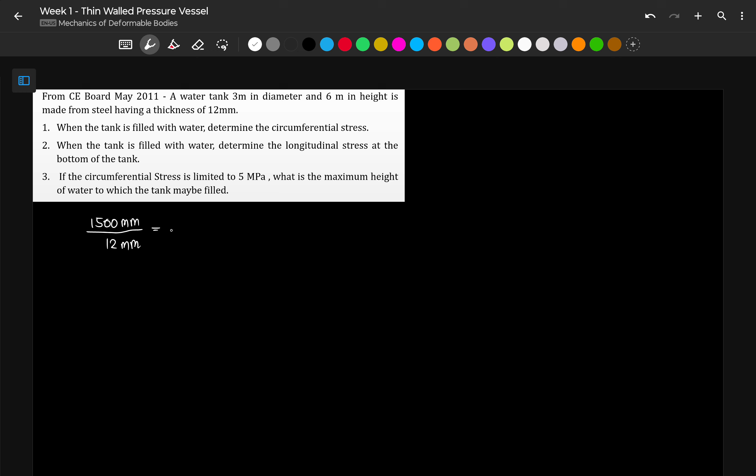Our radius is 1,500 millimeter, and our thickness is 12 millimeter. That is equal to 125 ang kanilang ratio, which is greater than 10. So, pwede natin sabihin na ito ay thin-walled.

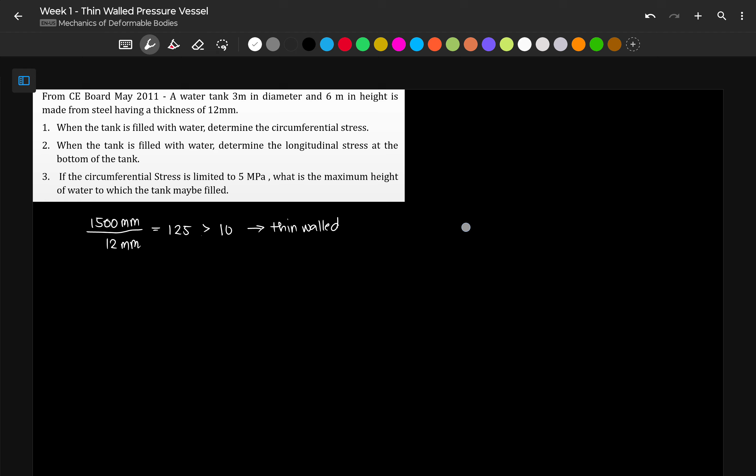Okay, so continuing. So, sure na tayo na ito ay thin-walled. Since cylindrical yung ating tank, pwede tayo gumamit ng formula. Pero for now, I think much better kung malaman muna natin yung konsepto, i-apply muna natin dito, tapos i-check natin.

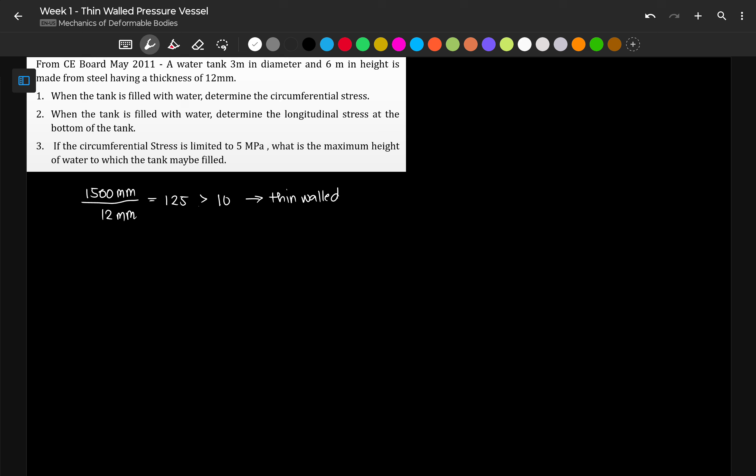Later on. So, ang tanong sa atin nung una, number 1, ay circumferential stress. Pwedeng tangential stress yon, pwedeng hoop stress, pwedeng girth stress. So, that is sigma sub t.

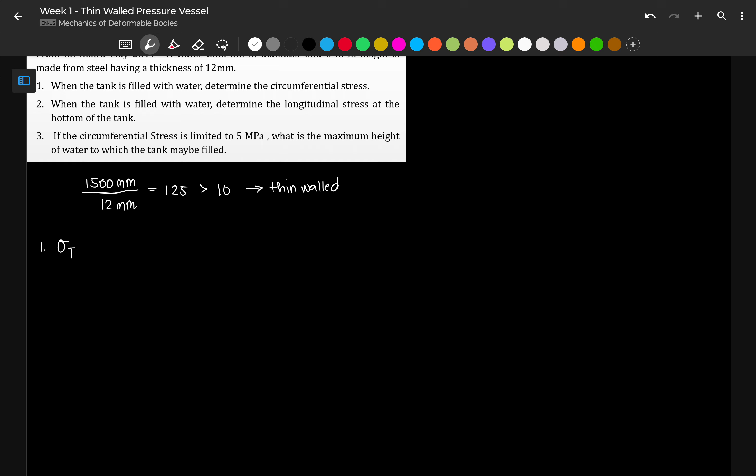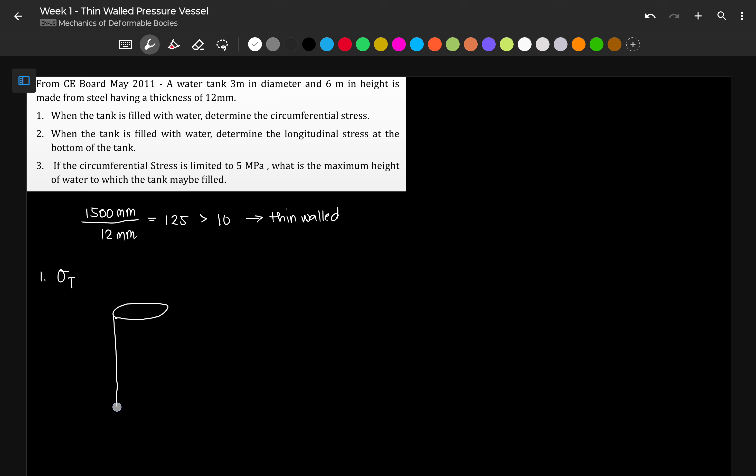Sabi natin, yung sigma sub t, nakukuha natin pagka kinat natin longitudinally yung tank. So, yung water tank daw natin ay cylindrical in cross-section. Kaya, dahil sa diameter, patayo yung gagawin kong drawing sa tank. Ito yung ating tank.

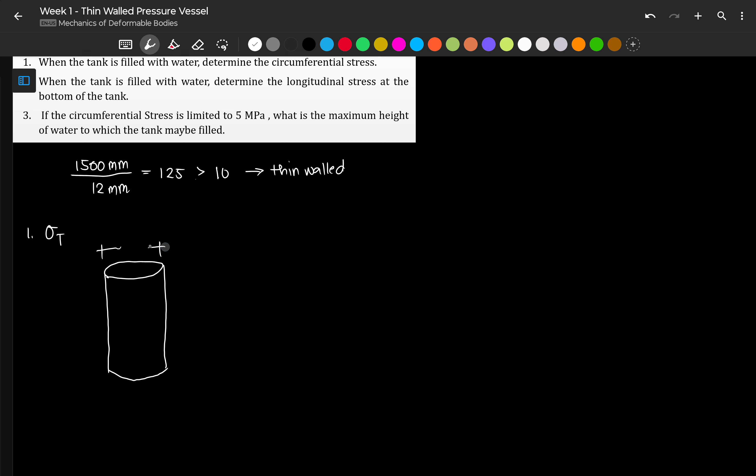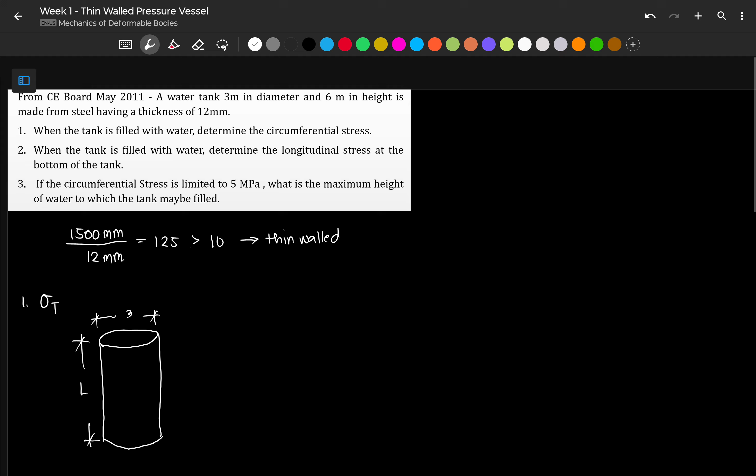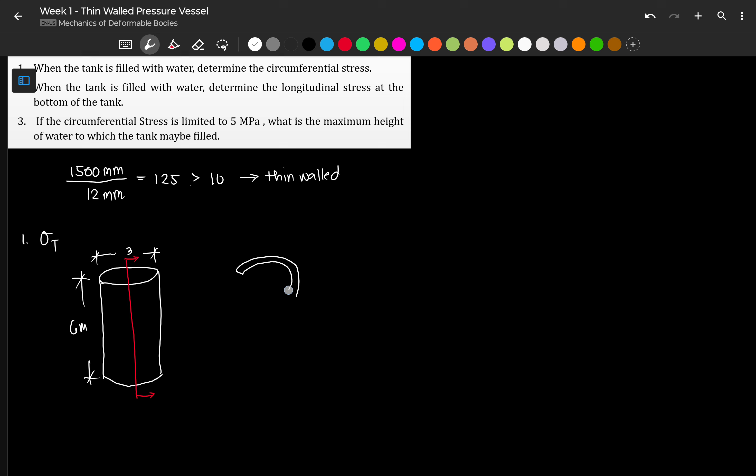Again, the diameter here is 3 meters, and the length of our tank is 6 meters. So, para makita natin yung ating transverse or yung ating tangential stress, kailangan natin siyang ikat longitudinally. So, pagka kinat natin yung ating tank, ang maiiwan sa atin ay something like ayan. So, pag kinat natin yung tank, ito ang ating makikita.

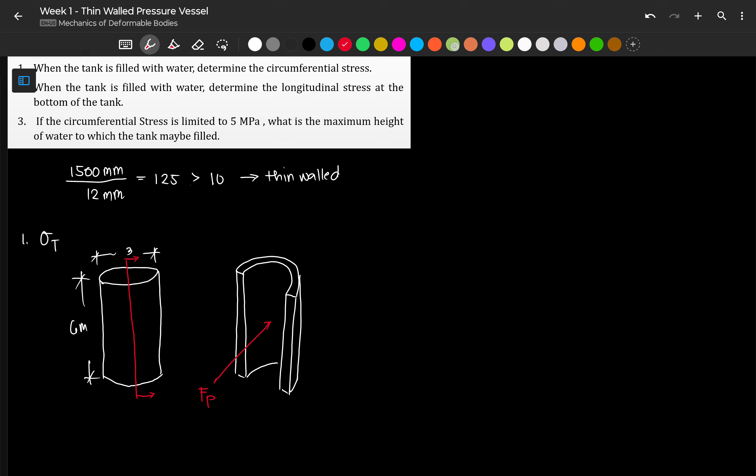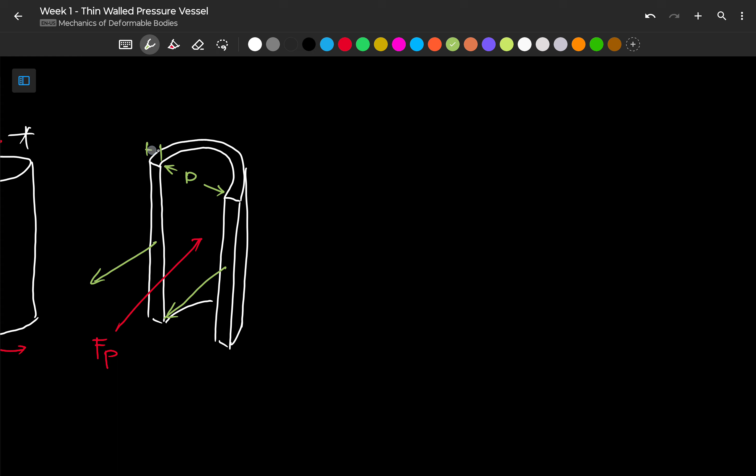Again, may force dito galing sa pressure. Then, meron tayong dalawang nagre-resist. Now, for the dimension, ito hanggang dito, that is our diameter. And then, ito ay ang ating thickness. And then, meron tayong length L. Okay, so yan yung ating tank.

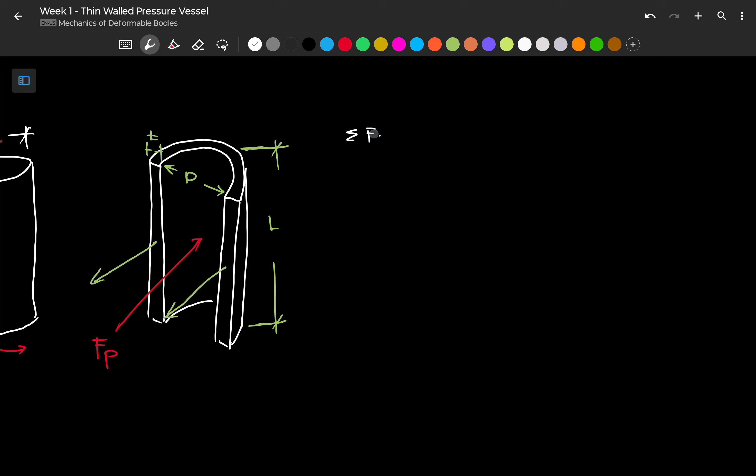Yan yung kanyang internals. So, sabi natin, by summation of forces horizontal is equal to 0, our FP, the force due to pressure, is equivalent sa dalawang resistance R. So yun, R tsaka R.

Now, since pressure is force over area, again, ang ginagamit natin na area ay yung area projected by pressure. So, this area, ito yung para kay pressure. So, we can say that our FP, ito na lang, our FP is pressure times the area. So, pressure multiplied by our area, this in this case is diameter.

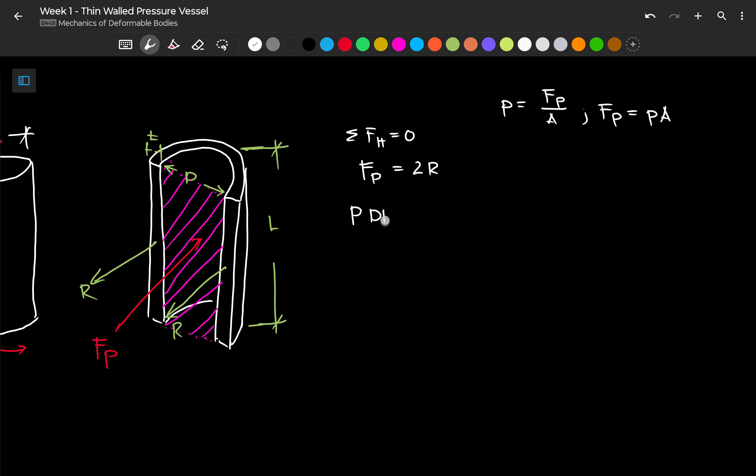Diameter yung lapad niya, yung taas naman niya ay length. So, PDL or pressure D L, multiplied by the diameter multiplied by the length. And yung ating single resistance, ang area naman na nagre-resist para hindi siya sumabog or mag-burst ay ito, which ang lapad niya ay thickness, ang height niya ay L. So that is 2 multiplied by the stress on the tank wall multiplied by the thickness times the length.

So that is yung stress natin is equivalent to the R nung isang area all over the thickness times the length. Kaya tayo merong sigma T L. Cancel na si L. Again, our stress now, tangential ito, is equivalent to PD over 2T. So, na-derive na naman ulit natin.

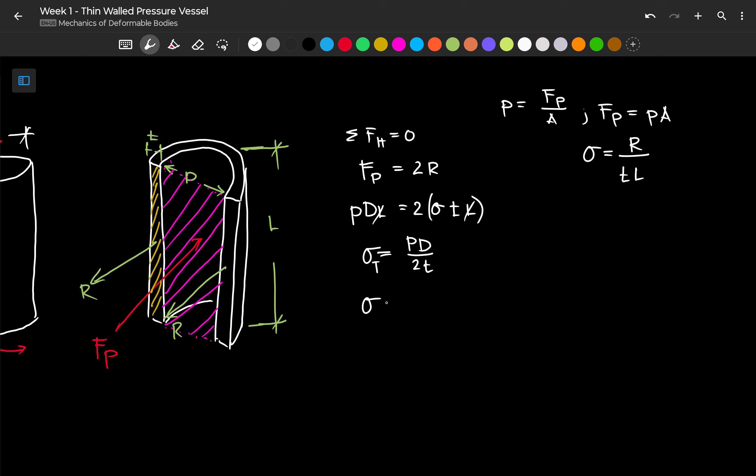So, our stress tangential is, according to the problem, walang given na pressure. Pero ang sabi, filled with water. Kung puno ito ng tubig, then our pressure is density, gravity, height. So, the pressure now, the density of water is 1,000 kilogram per cubic meter multiplied by the gravity na 9.81 meters per second squared and the height of water na 6 meters. So our P is 1,000 times 9.81 times 6.

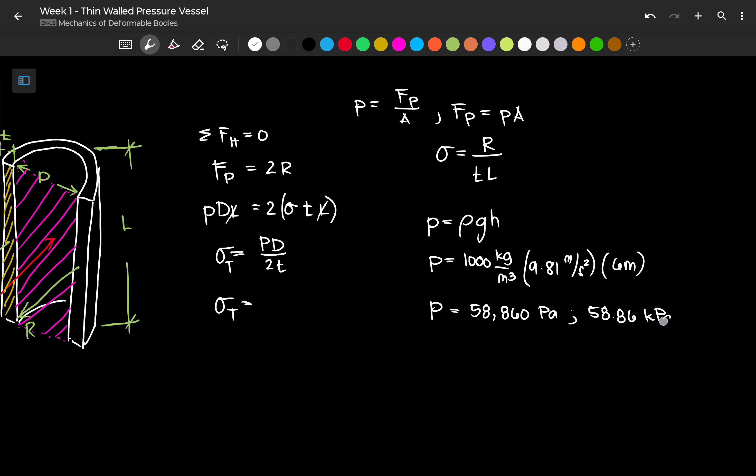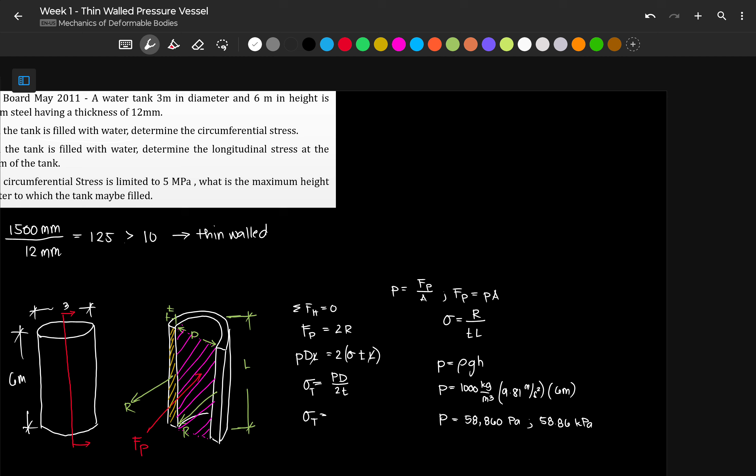58,860 Pascal, or that is 58.86 kilopascal. So, yung diameter natin ay naka-meter, yung thickness natin ay naka-mm. So, we have to be consistent on the units.

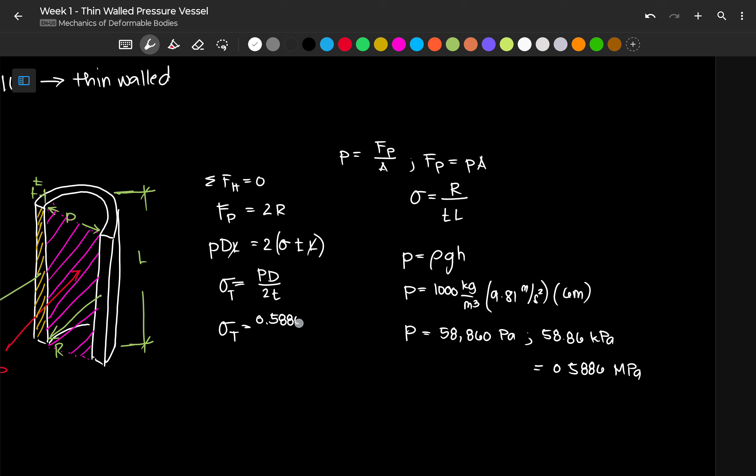So, it is either we go back to the base units or we convert everything to megapascal or in Newton. So, let's say our pressure na lang, gawin na lang natin Newton per millimeter squared. So, the unit is Newton per millimeter squared. Itong 58.86, that is equivalent sa 0.5886 megapascal, or that is Newton per millimeter squared, multiplied by our diameter na 3,000 millimeter divided by the two thickness na 2 times 12 millimeter.

So, that is 0.5886 times 3,000 all over 2 times 12. We have 73... 0.575, cancel na to, Newton per millimeter squared. So basically, kahit yung pressure natin ay naka-kilopascal, hindi to megapascal, kulang na isang zero. That should be 0.0, okay?

586. So anyways, pinapakita ko lang dito na ang dapat lang na consistent na unit mo ay yung thickness and diameter kasi ratio nga ito. So, ito, we can use yung kilopascal. Pag ginamit natin yung kilopascal na 58.86 kPa, kPa din ang magiging unit ng ating stress. And that is, let's try to solve it again.

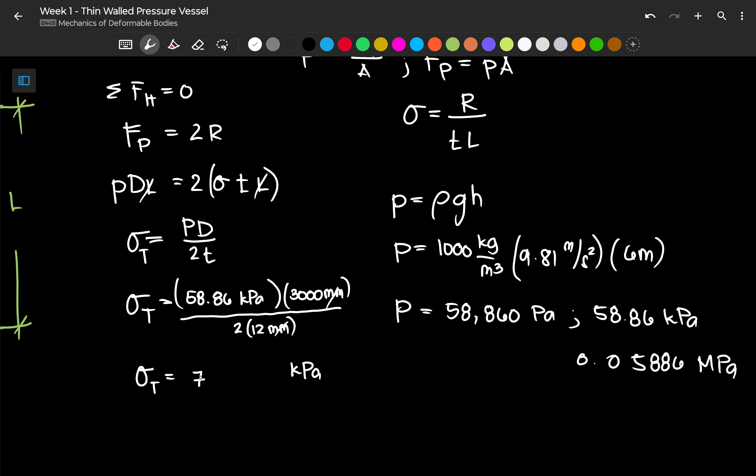58.86 times 3,000 yung diameter natin over times 2 times 24... 2 times 12, we have 7,357.5 kilopascal.

Or our stress is 7.357 megapascal. And that is our answer for this one.

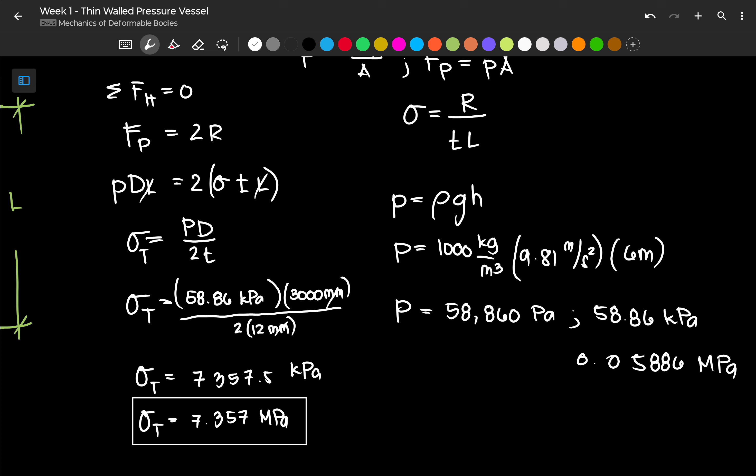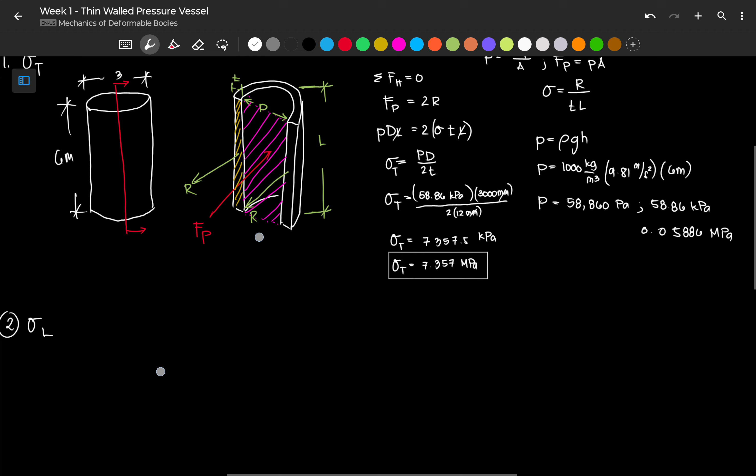Okay, let's proceed with the next question. The next question is longitudinal stress. So we said, tangential stress is 2 times the longitudinal stress. So our longitudinal stress is tangential stress over 2, which will give us 7.357 megapascal over 2, or our longitudinal stress is 3678.75 kPa. Ay, sorry, we already divided by 2.

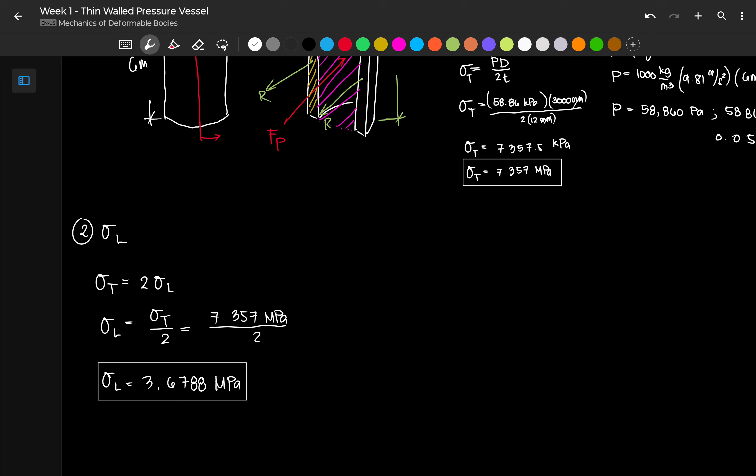3.6788 megapascal. So this is our answer for this problem.

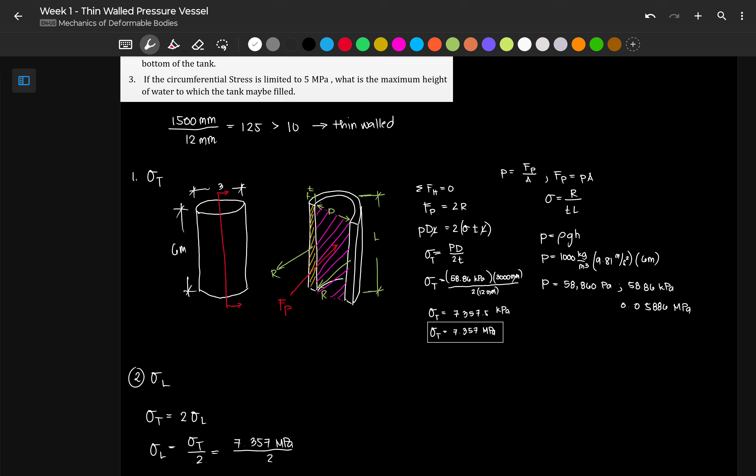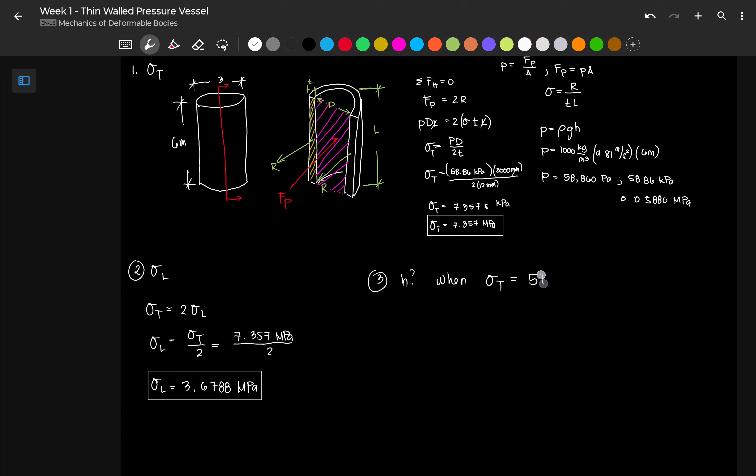Ay sorry, meron pang last one pala. If the circumferential stress or the tangential stress is limited to 5 megapascal, what is the maximum height of water the tank may be filled? So ang tinatanong sa atin ay height of water when the tangential stress is limited to 5 megapascal. We said earlier, our tangential stress is equivalent to PD over 2T.

But our pressure is density times gravity times height. Since we are limited to 5 megapascal, we have to convert it to pascal kasi ang unit nito ay pascal, so we have to be consistent. So our rho is 1,000 kilogram per cubic meter, our gravity is 9.81 meters per second squared, and our height is unknown. Multiplied by, pressure pa lang ito, multiplied by the diameter na 3,000 mm divided by 2 times 12 mm, so cancel.

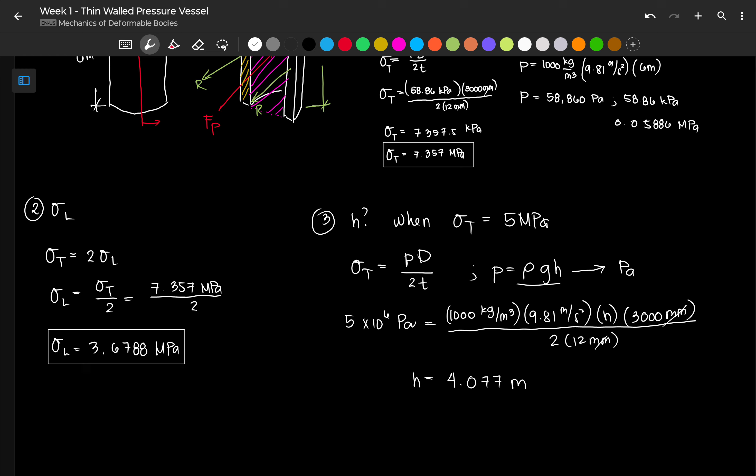Ang matitira na lang sa atin ay yung meter inside this pascal. So therefore, our height is 5 times 10 to the 6th equal 1,000 times 9.81 times height times 3,000 over 24. So our height is 4.077 meters. So yan daw dapat lang yung height ng tubig para hindi siya sumabog kung ang pressure natin, or ang ating circumferential stress, is limited to 5 megapascal.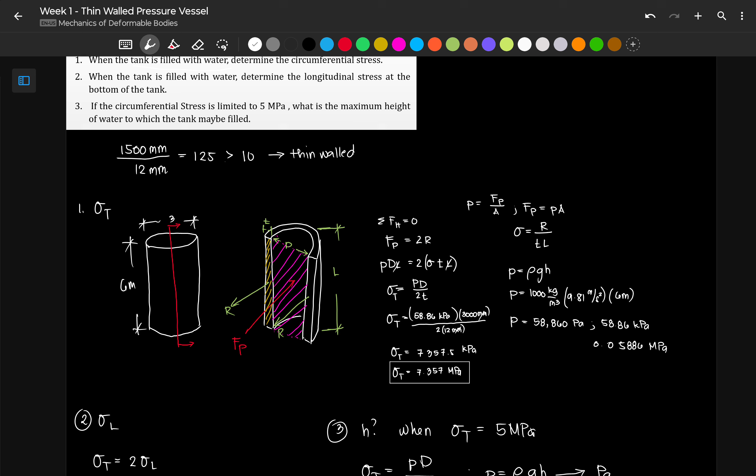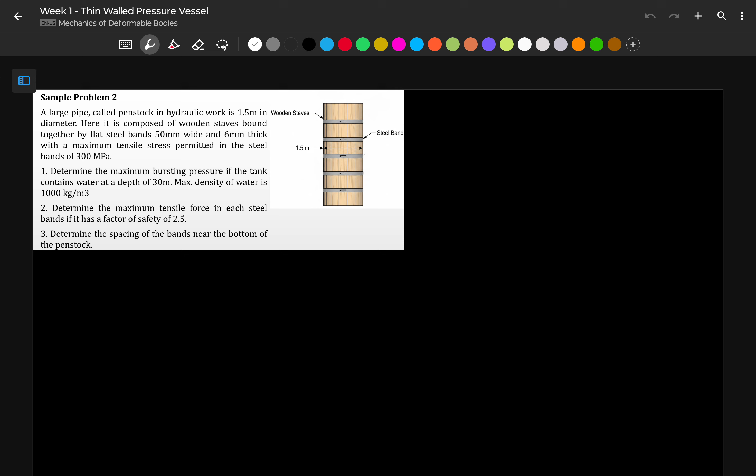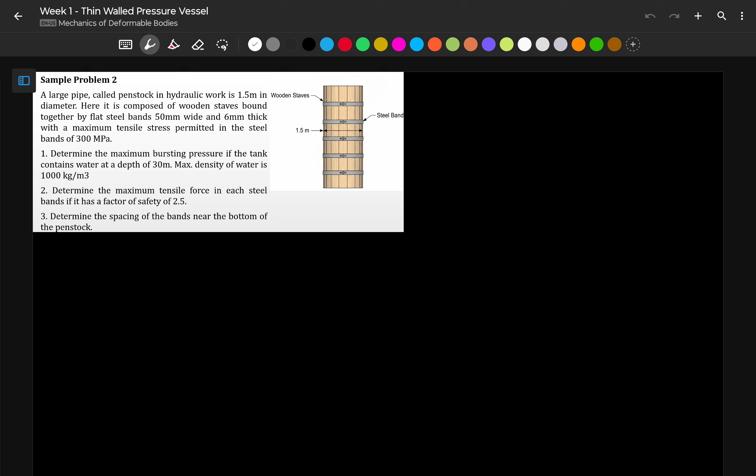Okay, let's proceed with the next sample problem. A large pipe called penstock in a hydraulic work is 1.5 meter in diameter. Let's assume that's the inside diameter being referred to. It is composed of wooden staves bound together by a flat steel band 50 mm wide and 6 mm thick, with the maximum tensile stress permitted in the steel bands of 300 megapascal. Determine the maximum bursting pressure if the tank contains water at a depth of 30 meters. The maximum density of water is 1,000 kg per cubic meter. Then determine the maximum tensile force in each steel band if it has a factor of safety of 2.5, and then determine the spacing of the steel bands near the bottom of the penstock.

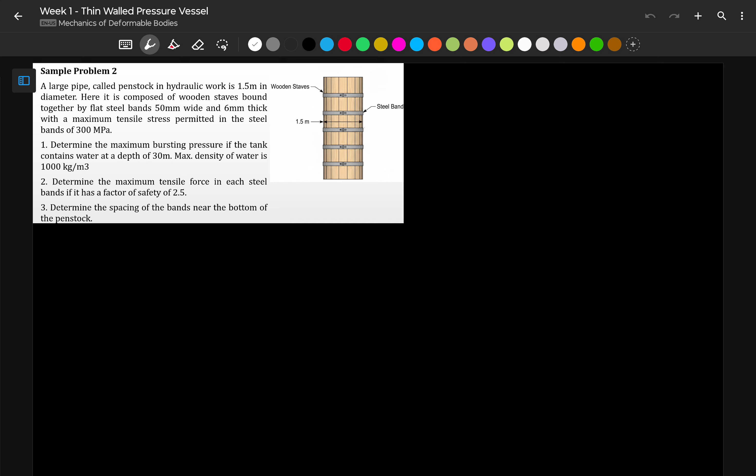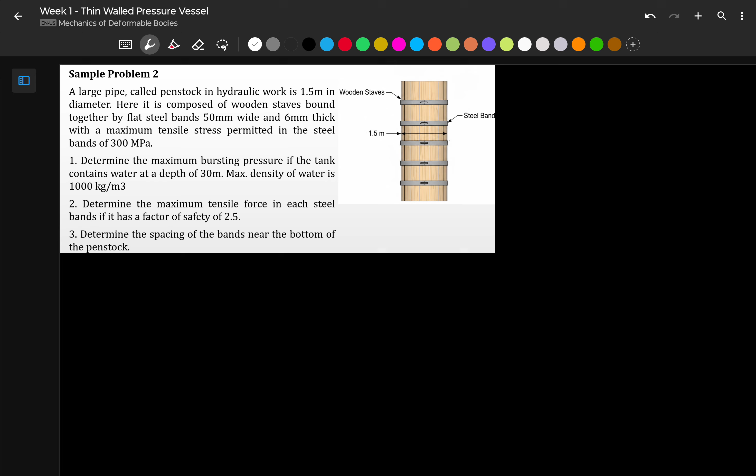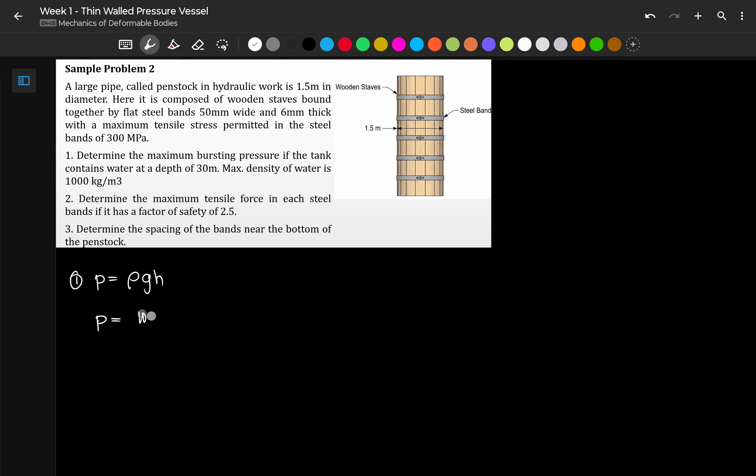So pressure lang yung tanong sa atin, that is pressure equivalent to density times gravity times height. So our bursting pressure is the density of water, 1,000 kilogram per cubic meter, then our gravity is 9.81 meters per second squared, then our height is 30 meters. So this is pascal now. 1,000 times 9.81 times 30 meters. This is 294,300 Pascal, or our pressure is 294.3 kilopascal. This is our answer for this problem.

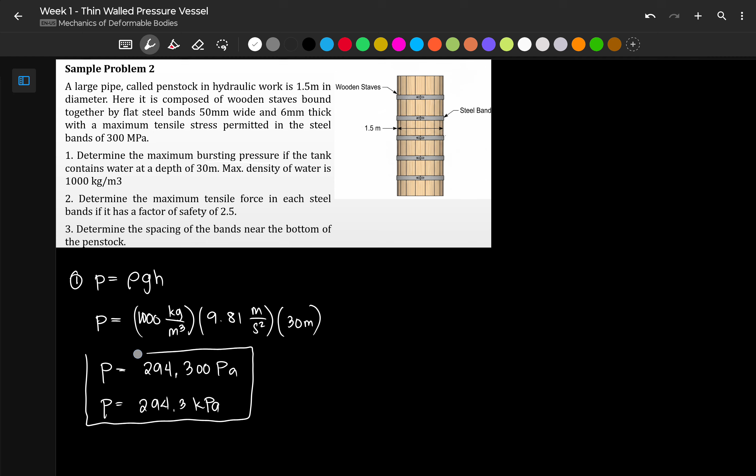So madali lang ano, number 2, ang tanong naman sa atin for number 2, maximum tensile force in each steel band if it has a factor of safety of 2.5. So ang tensile force sa steel band, tawagin na lang natin T, tensile force sa steel band, ay hinahanap when the factor of safety is 2.5. Remember that our factor of safety is equivalent to the allowable stress, or the working stress, over the actual stress. So kung ang factor of safety natin ay 2.5 at ang working stress natin ay 300 megapascal, therefore yung actual stress lang dapat niya ay 300 over 2.5, which is 120 megapascal.

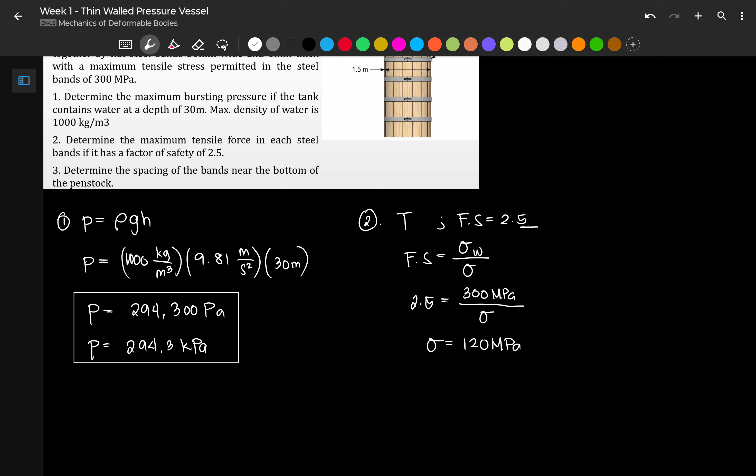Ito lang daw dapat yung dinadala ng ating steel band considering a factor of safety na 2.5. Although ang capacity niya ay 300 megapascal, hindi raw natin pwedeng sagarin yon, kailangan mag-iwan tayo ng factor of safety na 2.5. Okay, next, hindi yan yung tanong. Ang tanong sa atin ay yung ating tensile force. Since yung steel band natin, nire-resist niya yung pressure, ito yung steel band, i-draw lang natin. Parang may mali sa drawing ko. Saan?

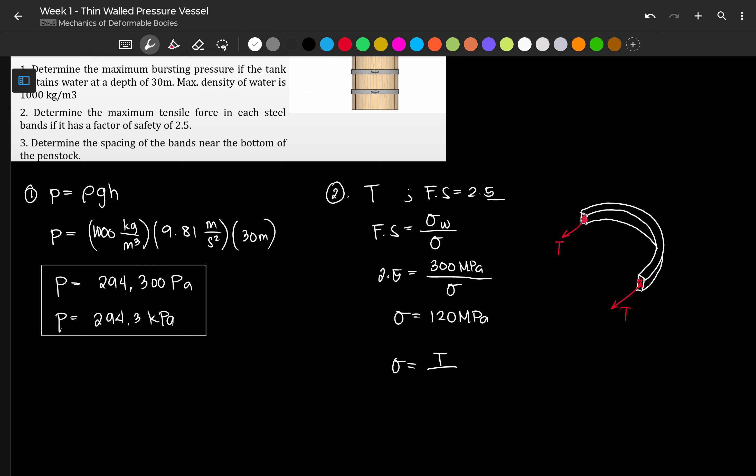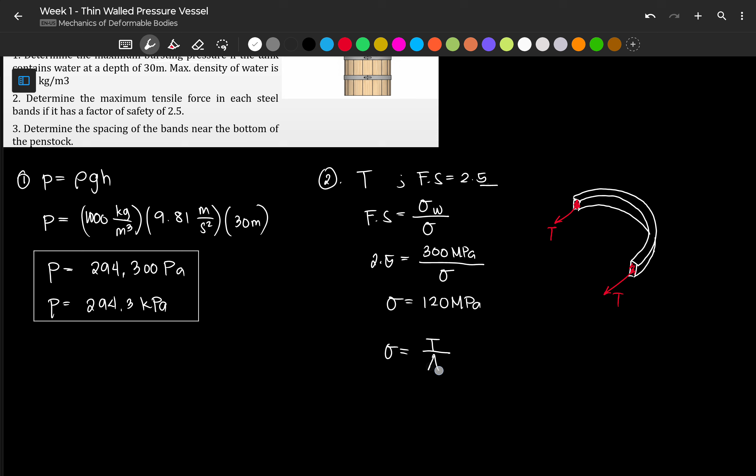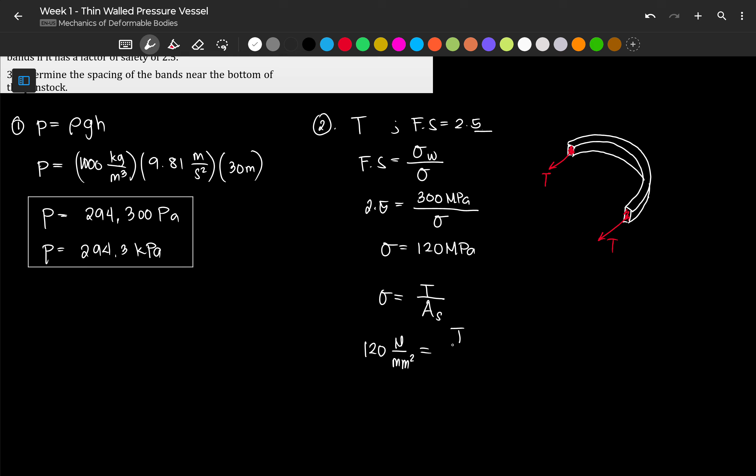Isa lang ang i-analyze natin, isang segment lang kasi equal lang naman yan. So, our force T or our tensile force T divided by yung area ng steel band. This is 120 Newton per millimeter squared. Hinahanap sa atin yung tensile force o yung resistance ng steel band. According to the problem, yung steel band natin, ang kanyang dimension ay 6 millimeter thick.

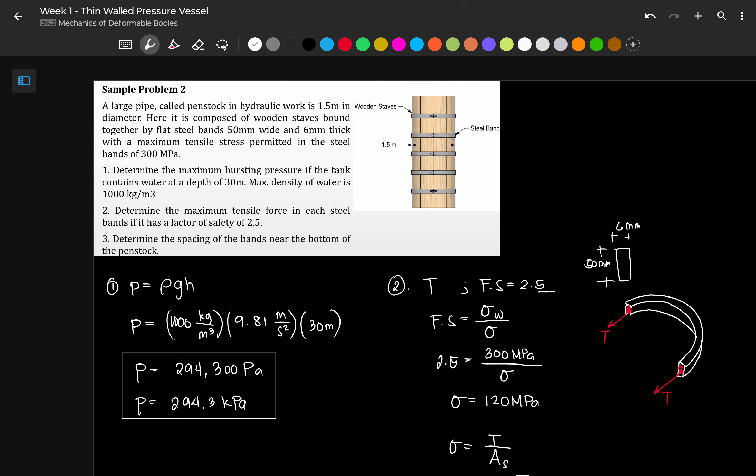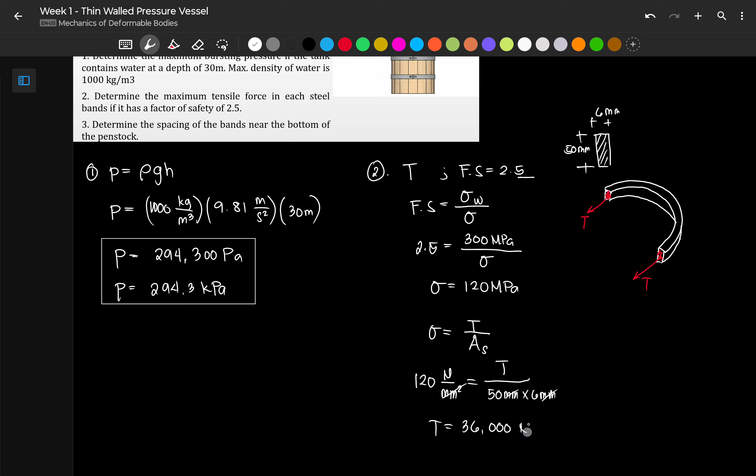Tapos, siya naman ay 50 millimeter wide. So, yan yung steel band natin. Ngayon, ito yung area na nagre-resist ng tensile force. So, this is 50 mm by 6 mm. Cancel na yung mm. So, we have 120 times 50 times 6. We have 36,000. So our tensile force is 36,000 Newton. Or T is equal to 36 kilonewton.

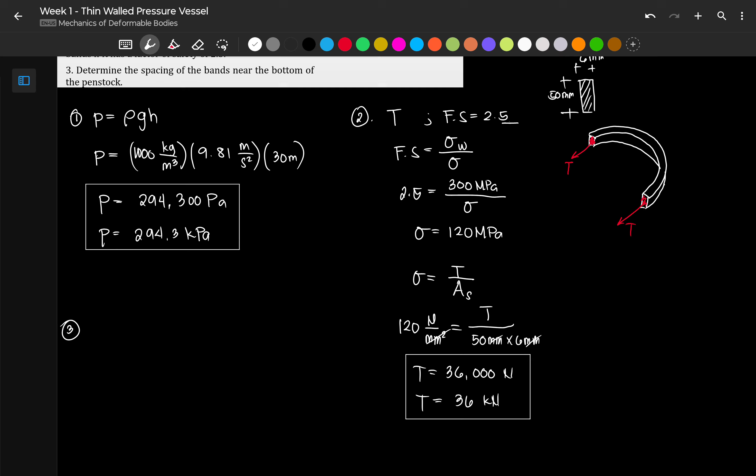So ito ngayon yung force na kine-carry ng steel band considering a factor of safety na 2.5 and a working stress na 300 megapascal. Next, the last question is, determine the spacing of the bands near the bottom of the penstock. Kung ito yung bariles natin, ang tinatanong sa atin, gaano kalayo yung pagitan ng bawat steel band.

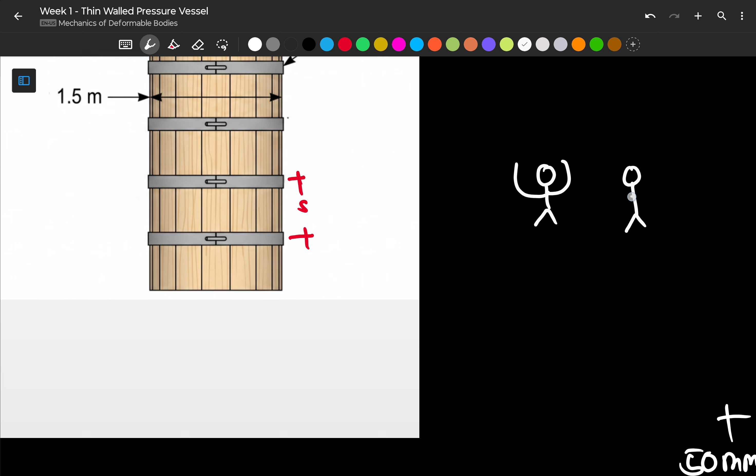Okay, so ganito. Kung ako yung steel band, imagine niyo meron tayong tatlong tao. Si tao 1, si tao 2, saka si tao 3. Silang tatlo, may buhat-buhat na log. Dapat equal ng buhat kasi equal naman yung spacing nila.

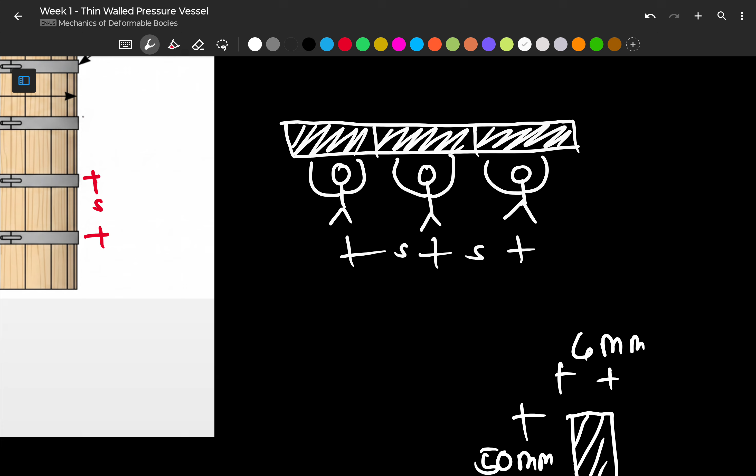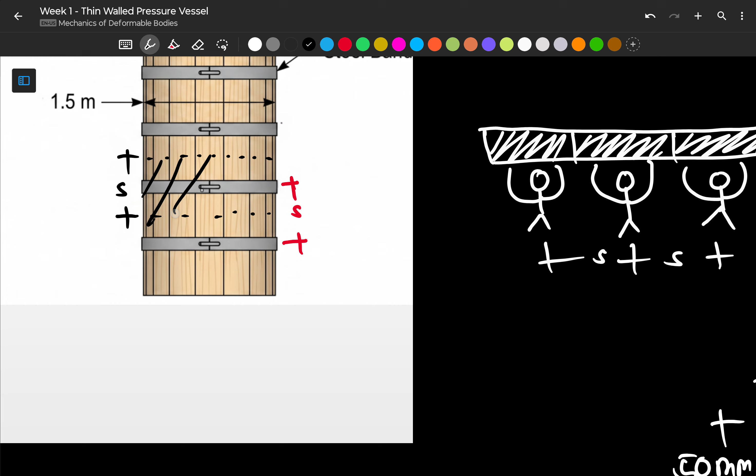Si tao 1, ang nire-resist niya, hatiin natin sa tatlo, ang nire-resist niya ay ito. Si tao 2, ang nire-resist niya ay ito. Si tao 3 naman, ang nire-resist niya ay ito. Dapat equal daw sila. So, in this case, ang proper location ng ating spacing ay yung mga center to center ng ating mga span. So, ito yung area na nire-resist ng steel band na ito.

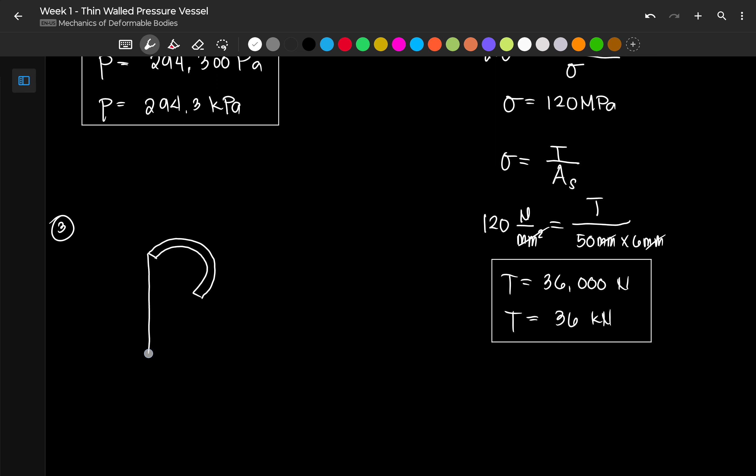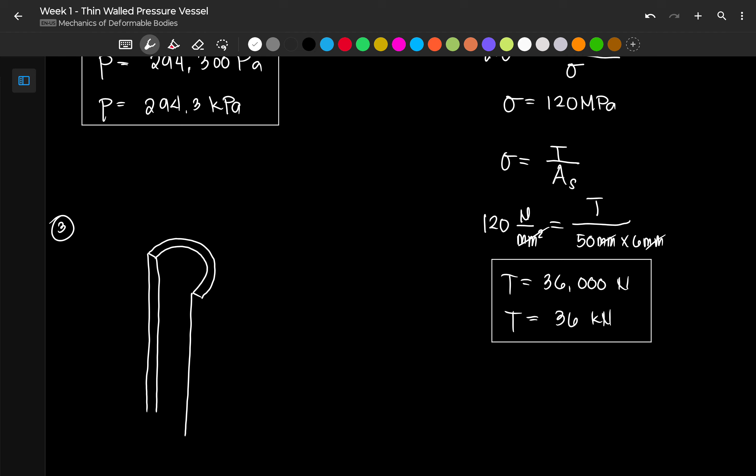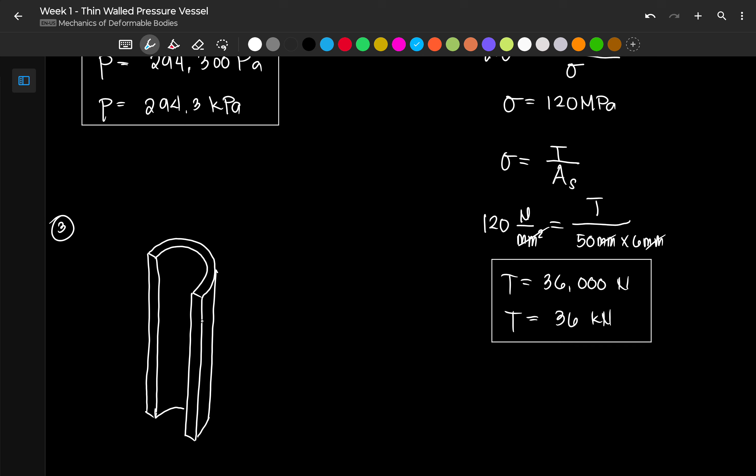Okay, yan yung area niya. Kung i-draw natin, ayun na pala, nakadrawing na. So, therefore, pag nag-analyze tayo ng problem, kung i-analyze natin ang ating penstock, pag kinat natin siya, daming drawing. Then, lagyan natin siya ng steel bands. So, dito, meron tayong steel band.

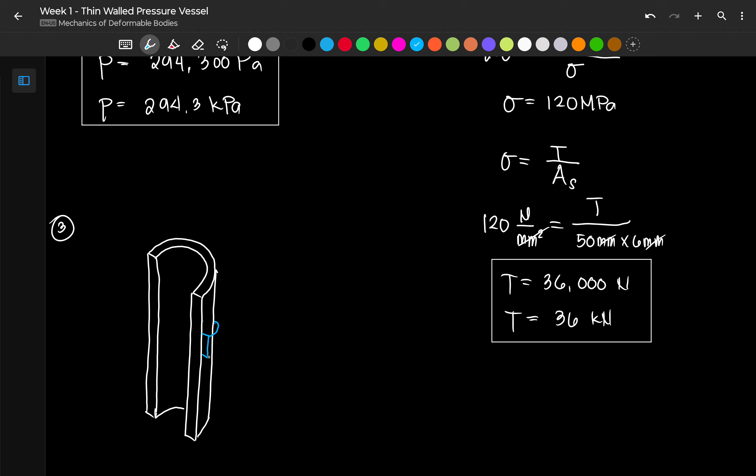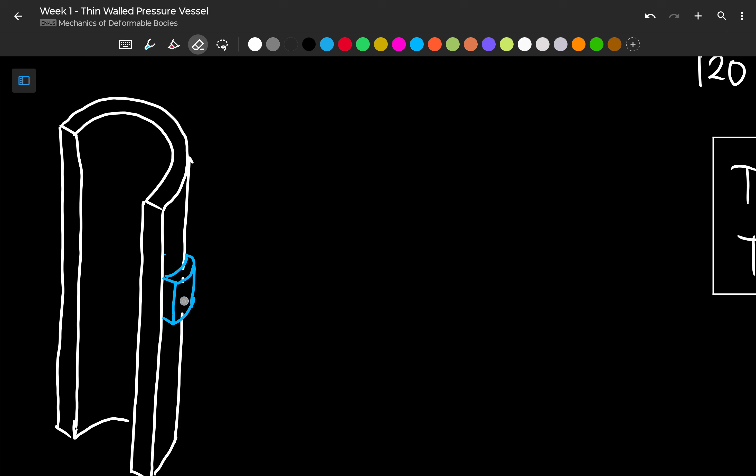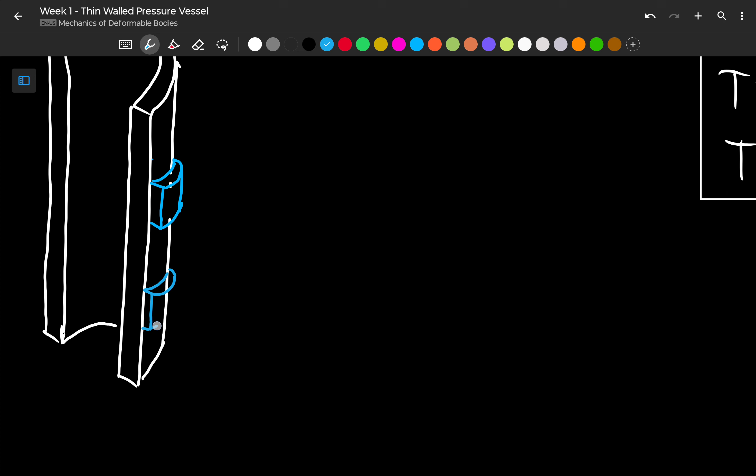Okay, then, another steel band dito. Ano nai-imagine ninyo?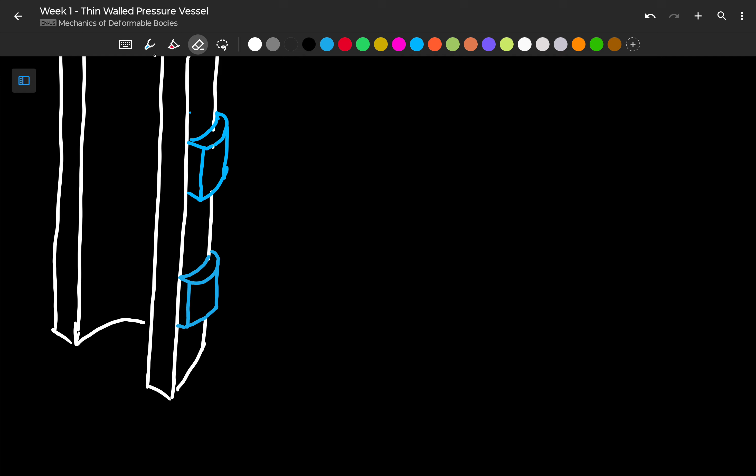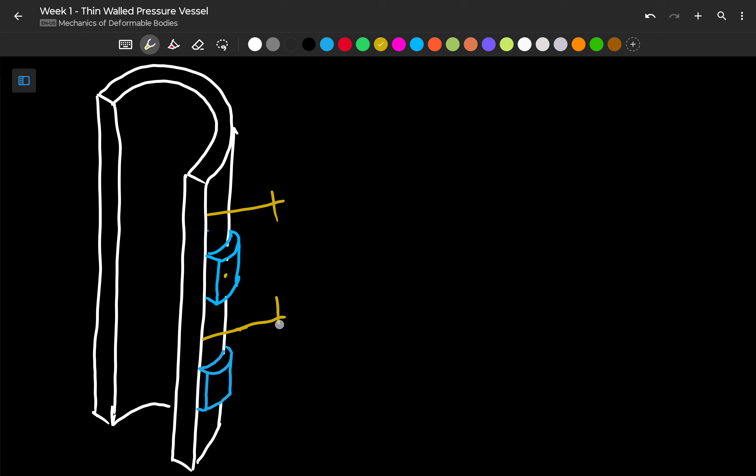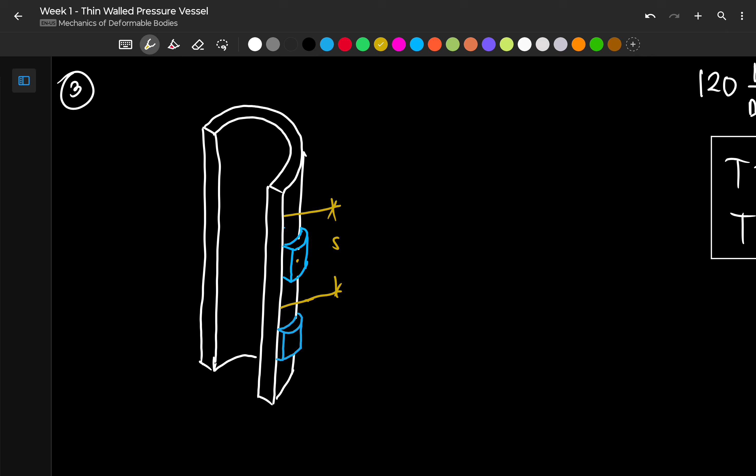So, ang kine-carry ng steel band na to, dito, ito mismo, ay yung spacing S lang. Yung nagke-carry ng ibang band, ng ibang span, ay ibang steel band na. Ngayon, mangyayari dito, yung steel band natin, since di ko pala na-drawing yung sa kabilang side, ito na lang isa i-draw ni sir. Para mabilis.

Yung steel band natin dito, may nire-resist siya dito na force due to pressure. Tapos ito namang ating steel bands, sabi natin kanina, yan ay under a tensile force na nakuha na natin kanina. So in this case, yung force due to pressure na nire-resist niya ay yun lang sakop niya. So, ito na lang yung force due to pressure niya. Kasi, yung ating other force due to pressure sa kabilang side, nire-resist na yan ng ibang steel band. So, ito lang yung coverage niya.

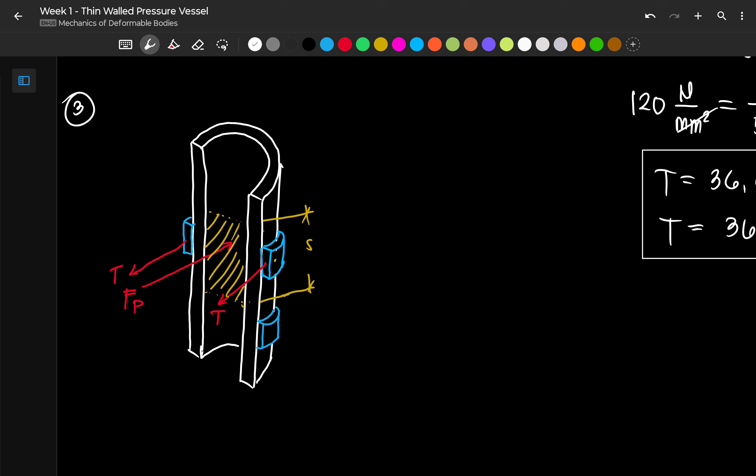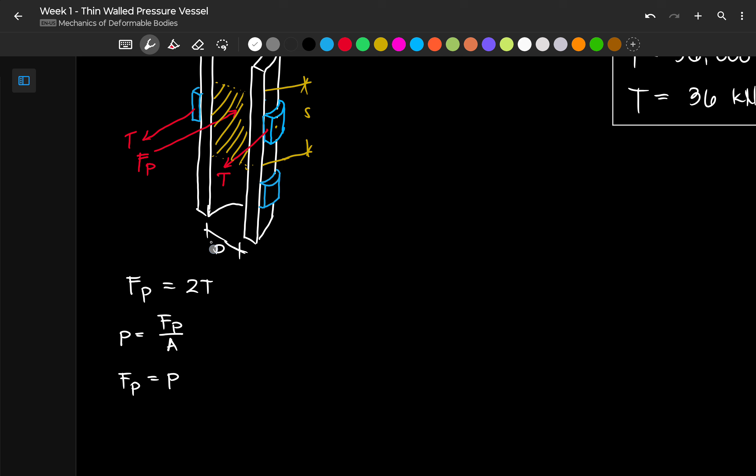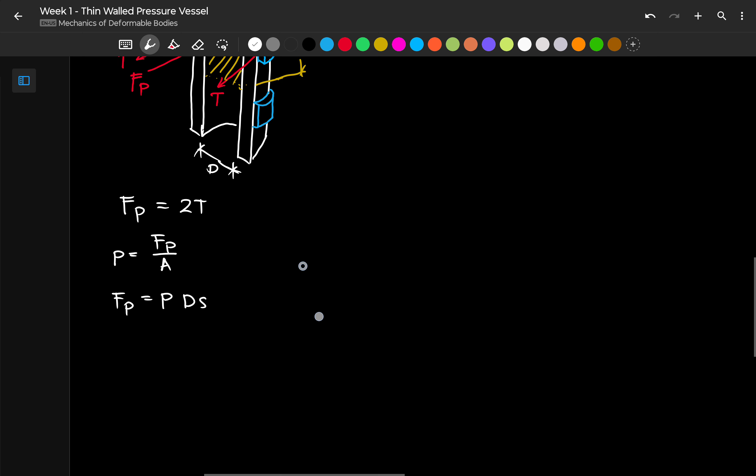Yan lang ang sakop niya. So, again, we have FP is equal to 2T. Na-compute na natin yung tensile force doon sa ating material, na 36 kilonewton. So, the force due to pressure, pressure sir is force over area. Therefore, our FP is the pressure, which is we already solved, multiplied by the area. Ang area na lang ngayon na ina-applyan natin ng pressure, if this is the diameter, is diameter multiplied by S na lang. So, the area is diameter multiplied by S. Therefore, our FP is P ds.

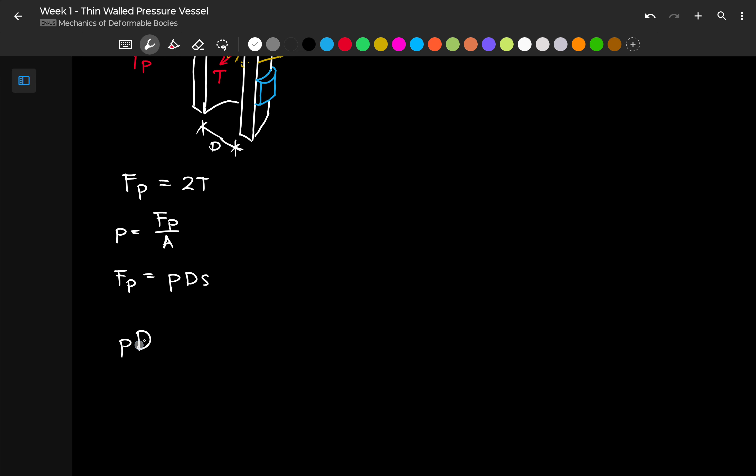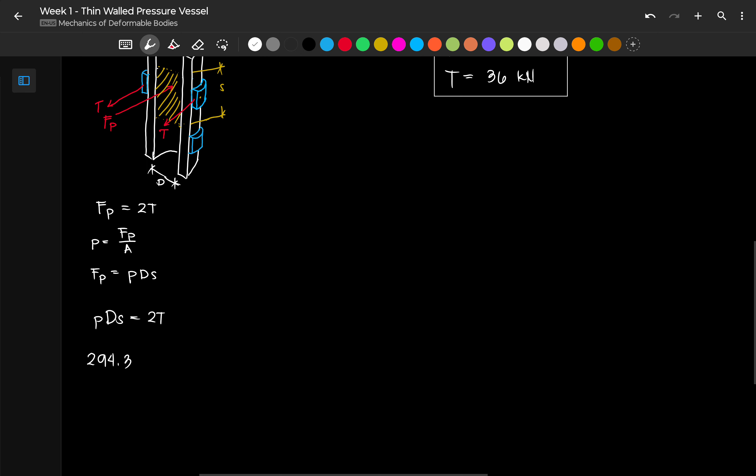Ba't ba malaking P yung pressure ni sir? Maliit na P lang dapat si pressure. So, P ds equivalent sa 2T. So, our pressure, according to the problem, is 294.3 kilopascal. Since naka-kilopascal ito, gawin natin munang Newton meter lahat para hindi tayo mahirapan. So, times 10 raised to 3 Newton. This is our pressure, Newton per meter squared.

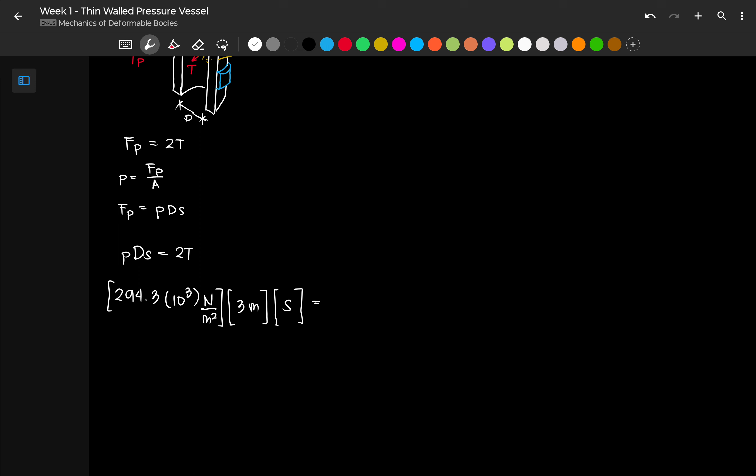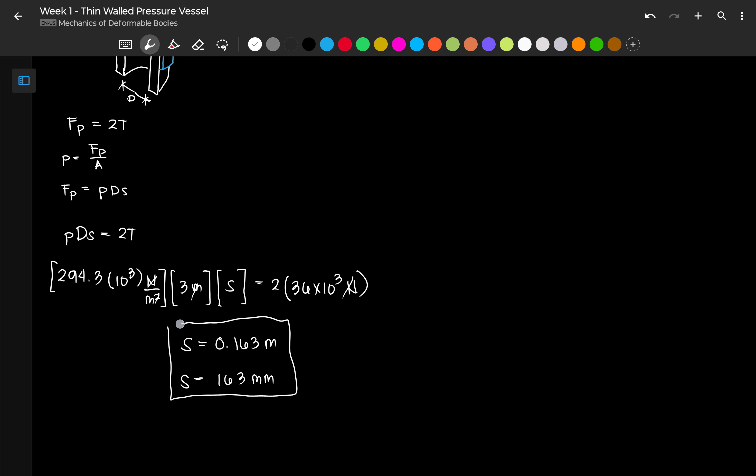This is our pressure. Our diameter is 3 meters. Hinahanap natin yung length S. And our tensile force is dalawang 36 times 10 to the 3 Newton. Cancel na to. Cancel ito. Matitira sa ating S in meters. And that is 0.163 meters. Or S is 163 millimeter. So, this should be the spacing of our hoops at the bottom of our tank.

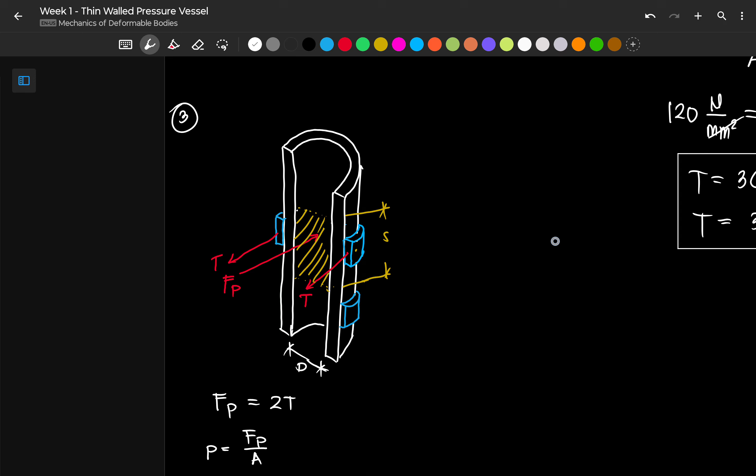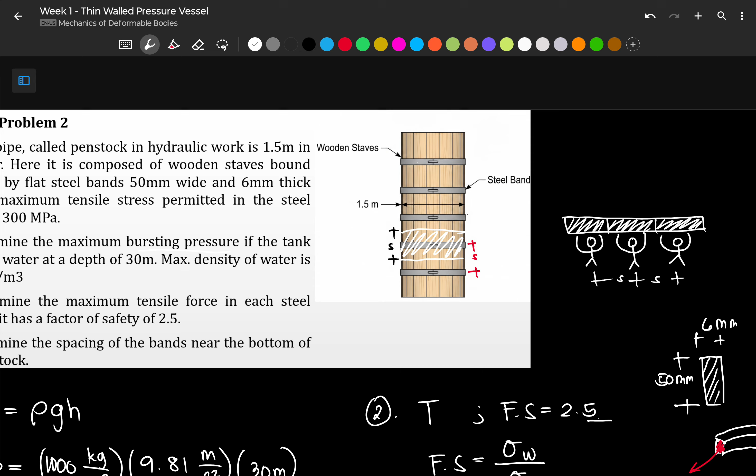Take note dito, na-compute natin yung spacing dahil hinati natin yung pressure. Ang nire-resist lang na pressure ng isang steel band ay yung sa spacing S. Hindi niya na-covered yung sa ibang steel band. Ito lang yung kanya. Yan lang ang kine-carry ng ating hoops. Yan, so yung area lang na yan, under the spacing. So, let's proceed with the next two problems, but let's continue that on a next discussion.